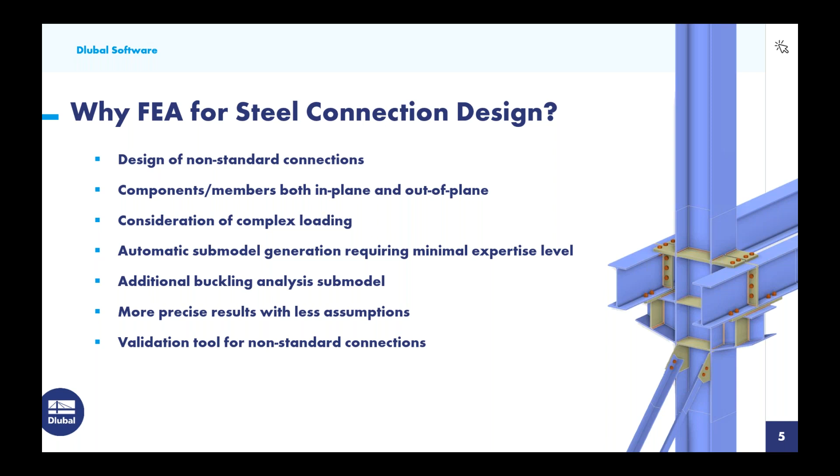So now moving on to the RFEM steel connection design concept. Again, a little unique in comparison to a lot of the other programs out there. So we will probably generate the entire steel structure in RFEM. It's not required, but this is one approach that we could take.

Welds are also converted to 2D elements for a stress design, as well as one-dimensional rigid links to transfer those forces again back to the plate elements. Now, we typically would model our steel structure with a linear elastic material. The program will automatically convert this linear elastic material to a nonlinear plastic material. So we'll be able to account for the yield strength of these steel materials themselves.

We also will have some geometric nonlinearities that are automatically created. And what I mean by this are topics called surface contacts, where essentially if we have two plates modeled together, they can fail in tension so that we have our bolts take over those forces, but in compression, we should see full force transfer. Some of the members, such as those spoke members that are modeled around our bolt elements, will also have nonlinearities applied.

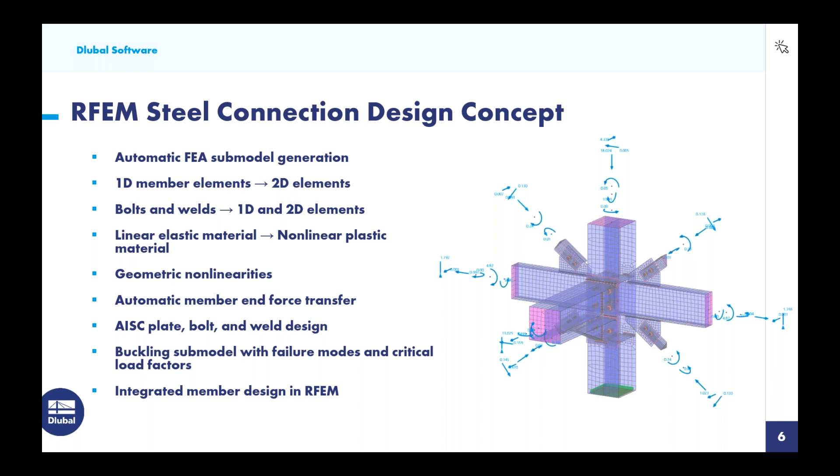And finally, the integrated member design within RFEM. Of course, we can get the connection design, but the ability to design the members themselves, and not just steel, but any material that we offer. So you could combine this connection design with concrete, aluminum, cold-formed steel, even topics like fabric tensile structures. We could do the steel connection design within that same file.

Okay, so we will begin then in RFEM here with our initial example. When we create a new model, we will give it a model name. The type of model here is going to be in a 3D environment. So although we just have a simplified 2D frame here, we still are accounting for all forces in and out of plane. Under the second tab, for those of you who are not familiar with our program, RFEM is the base program. This is where we can fully model, load a structure, and get the full static analysis.

But if we want to do a more advanced analysis like dynamics, for example, or we want to do design according to the various standards, this is where we would need to activate these optional add-ons. So you would purchase the add-ons that are specific for your project design. Now for today, we'll be activating here the steel design. So this carries out the steel member design according to the AISC, and of course the steel joints for our connection design.

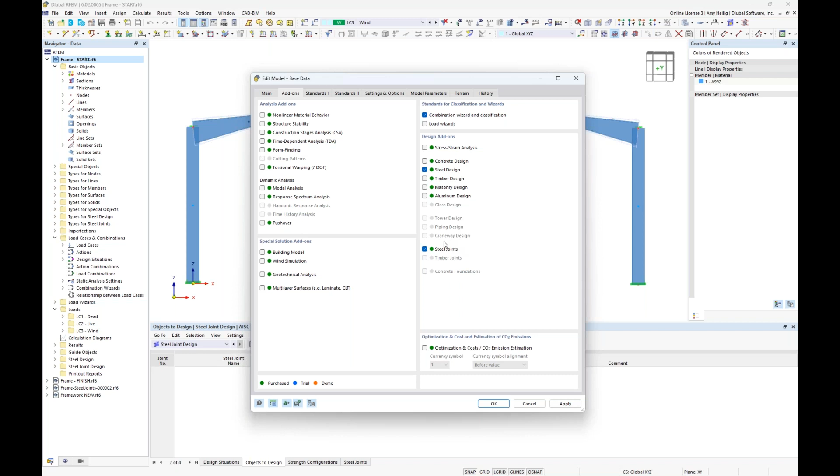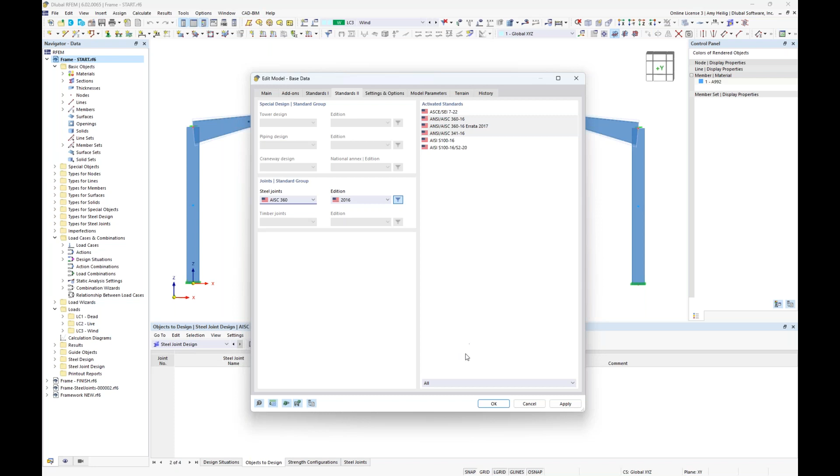Under the third tab, we will generate the load combinations automatically according to the ASCE 7. We have added the 2022 standard, so that's available here. The steel member design will be carried out according to the AISC 360-16. And under our fourth tab here, Standards 2, the steel connection design will be carried out also according to the AISC 360. So once all of this information is input into our base data, as you can see here, for the sake of time, I've already modeled this simple 2D frame here.

So let us just quickly go over some of the information already shown. Well, if we turn this into wireframe view, these members, as I mentioned, are just standard one-dimensional elements. So this is pretty usual for any FEA program, that when we model columns or beams or braces, they're represented by this single line only. But if we turn this into rendered view, we get a better understanding of what this line represents. Now, we also have here the materials assigned to these members, and currently these are all A992 linear elastic materials. We also have our cross sections.

You can see here the columns are assigned as W14x48. And for my beam members, these are W12x35s. But I also have applied a small taper at the beam member end.

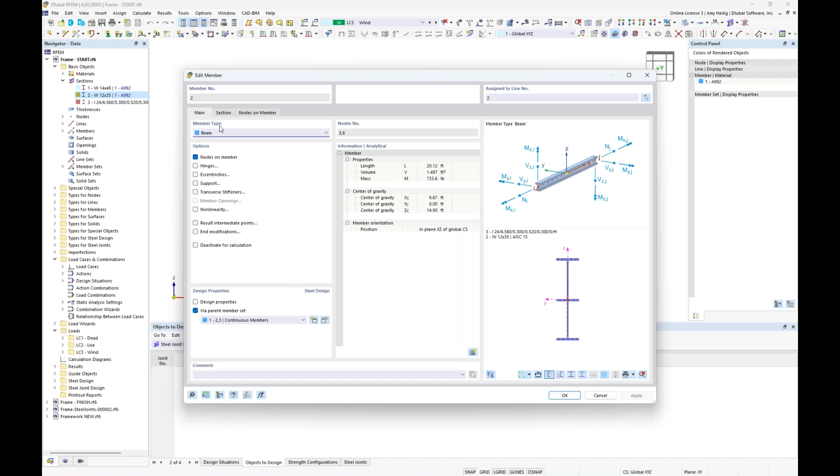So if we double click on this member to go into the beam dialog box, under the second tab here, section, we do have the ability to set a taper at the member start or the member end and other multiple options here. So I'm currently applying this taper at the first 25% of the member length. And we also can align the taper to the top of the member, for example,

and this picture over here will update accordingly. So as mentioned, the beams are primarily W12x35, but where this taper occurs at the member start, I took that W12x35, I created it as a user-defined section to simply increase the depth. So now we'll linearly transition in the first 25% of this beam member back to the W12x35. So that's a little bit about what's going on with our members.

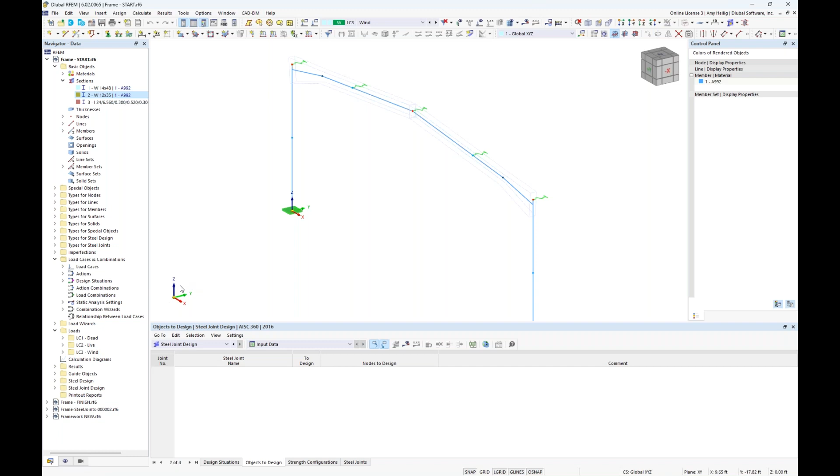So turning this back into wireframe view to quickly explain our support conditions, we have a fully fixed support down here at the bottom, which was just applied by utilizing the assign nodal support up here in my toolbar. And also because we are working in a 3D environment, I went ahead and put some additional spring supports up here only in the lateral global Y direction. So we'll account for maybe additional members framing in to give that lateral stability at the top of our frame.

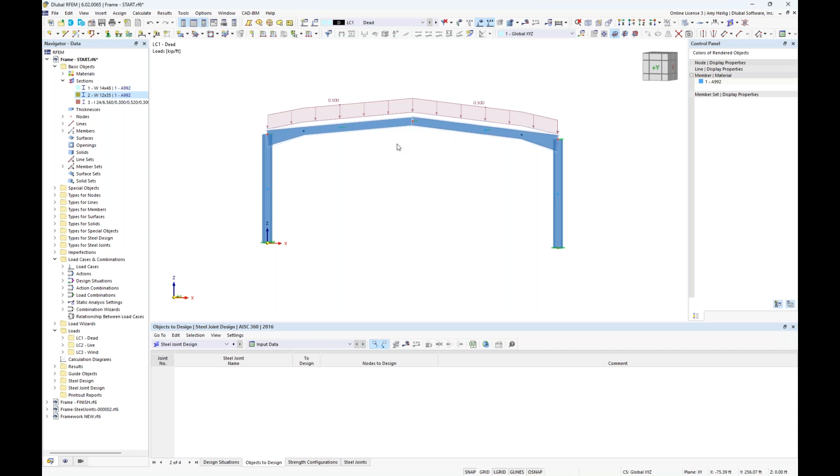And finally, we want to cover the loading. So we have 3 simple load cases for today, and we can see these within our drop-down box up here at the top. If I turn on my loads, my dead load is 0.5 kips per foot, applied as a member load. When we look at our live load, same concept here, just with a reduced magnitude of 0.3 kips per foot. And then a very simple lateral load here for our wind load case with 0.3 kips per foot at the front side and 0.15 kips per foot at the rear side.

Going into our load cases and combinations dialog box, we will once again see here under our load cases our 3 simple load cases for today, dead, live, and wind. Category was set accordingly to the ASCE 7. The program is automatically going to generate 2 design situations for us. We have here our LRFD design situation and our ASD design situation.

This is really nothing more than just grouping together all of our factored load combinations according to the ASCE 7 for this first design situation. And we can click on this little info button here to see the code references to those load combinations directly. Now notice that these are used within these optional add-ons that we turned on, so steel design and our steel joint or connection design. I will be utilizing these design situations. I'm carrying out my design according to LRFD for today.

Now we also have this second design situation, which is just simply grouping together our unfactored load combinations. I'm going to use this for my serviceability checks for my steel member design, but we really don't need it for our connection design because serviceability is not something that we're going to check. Now, alternatively, if you were carrying out ASD design for both your members and your connections, we could go ahead and turn it on here and maybe deactivate it for the LRFD design situation. But again, moving forward with LRFD design, we'll go ahead and leave these options as default.

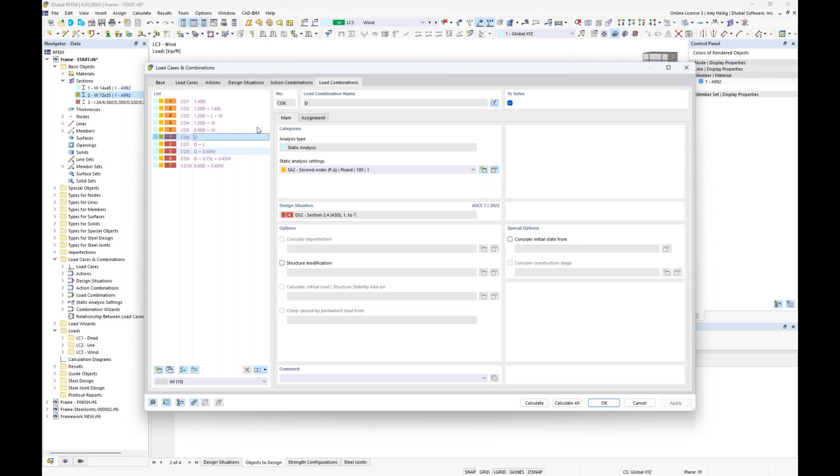And finally, under the load combinations, you can see here the individual load combinations listed out based on the load cases I have defined. All of my factored load combinations are shown here in orange, which belong to that first design situation. And then we have our unfactored load combinations shown in red that belong to the second design situation. So just keep these design situations in mind. We'll come back to them a little bit later on.

So now that we have fully reviewed this model, let us begin by defining our first connection. So because I have activated the steel joints add-on under my base data, we now have a folder option over here on the left called types for steel joints. Well, currently this is empty, but I can right click to create a new steel joint. And initially, I want to select the node that I would like to apply my first connection. So we can graphically select node number 6, or I could directly input the number here into this dialog box. Both of my members were automatically brought in.

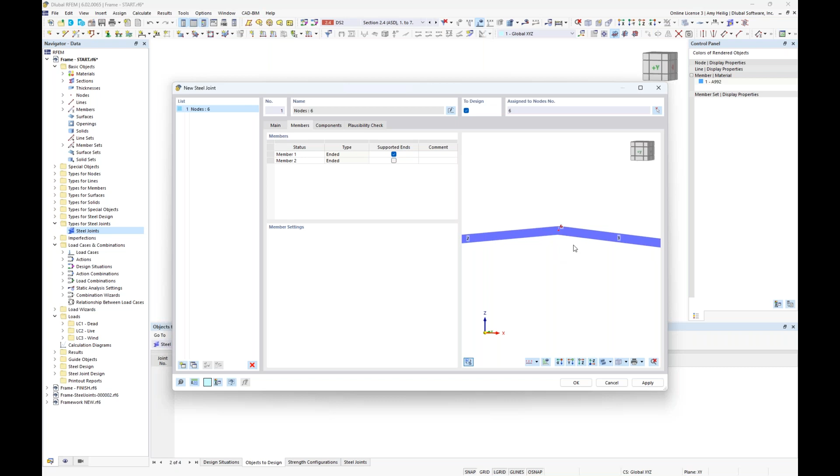Looking at this second tab. So remember that we are going to more or less extract out this submodel for our connection design and run it completely separate from our steel frame that's happening here in RFEM. And because of this, we need to fully support one of these members in that submodel. So we'll go ahead and utilize the support for the beam over on the left.

Now the type is set to ended. This only means that if all of these members simply end at this connection, then the type would be set to ended. Now, in another scenario where we maybe had a continuous column passing up through here, but it was modeled as two separate members back in RFEM, then we would have an additional type option available to us in a dropdown called continuous.

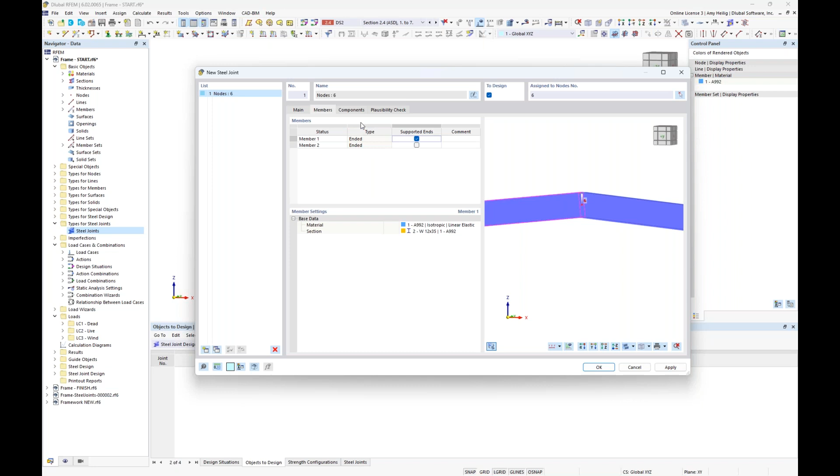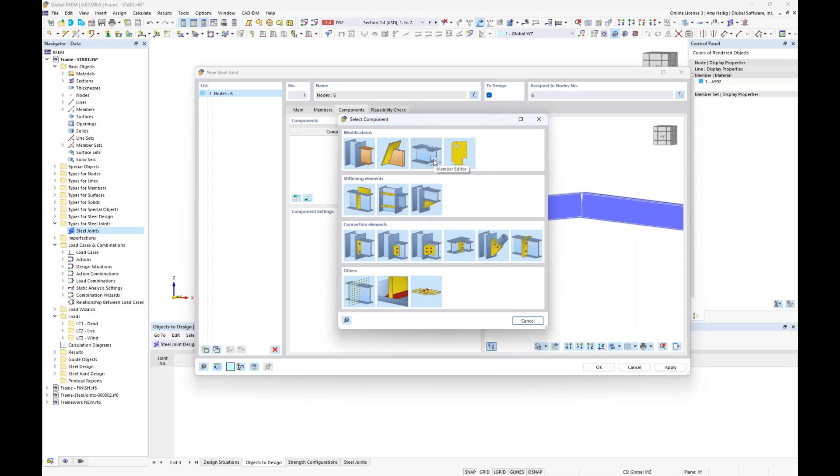Under the Components tab, this is where we begin to build up our connection components. And we could certainly individually do this with our component database. And we see each one of these components that we can individually input, such as end plates, or we can input fin plates, cleats, maybe plate-to-plate connections for beam splices. We also have stiffeners and haunches, and then we have some additional modifications up here that more so relate to the geometry. So we can make member cuts, or we can add in openings or notches into our beam elements.

But rather than inputting these individual components, we could also take advantage here of our library options. And within these joint template library options, we have 4 general categories, including rigid connections, pin connections. We also have truss connections and brace connections. So beginning here with the rigid connections, we have additional subcategories such as beam to column, and so on. And within these subcategories, we have additional template options.

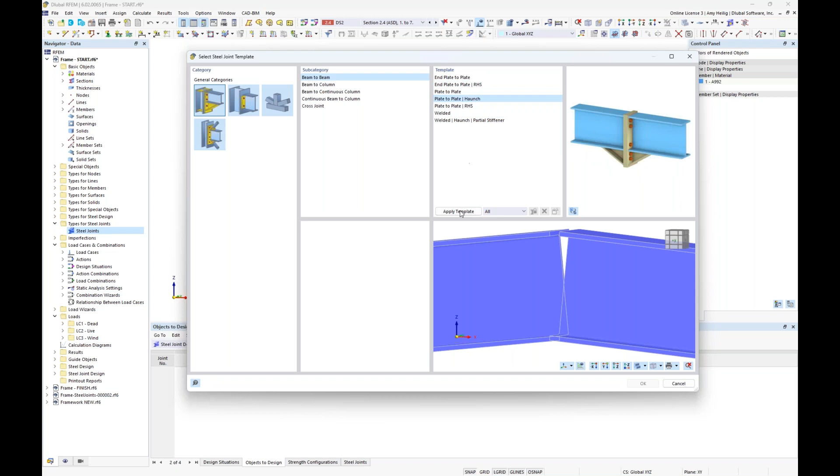So looking at the beam to beam, we have an end plate to plate. We have an end plate to plate with a rectangular hollow section. For today, we're going to utilize this option plate to plate with a haunch. So when I click apply template here, it's automatically going to apply these components from this library to my specific members here within my RFEM model. So I can click OK, and now we see these individual components listed out here and applied again to the members within the RFEM model background.

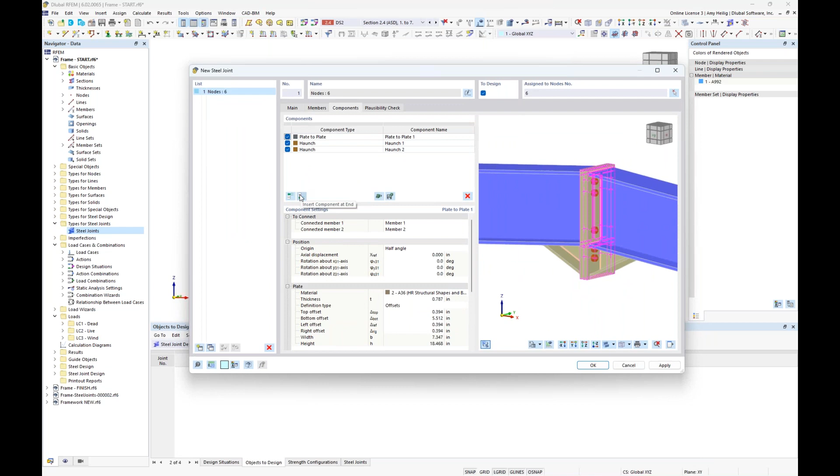Now, we could certainly add on with the individual components here and just use the library as a starting point. We'll certainly need to make some modifications here to our geometry, but once you have your connection set and you utilize this connection quite often, it's always recommended to save this under your own user-defined template as well. So you can see here within this button, we could give the connection a name, set the filter categories and subcategories, and now that connection will always be available for any future RFEM model. So that could certainly be helpful if you don't want to redefine the geometry changes or components every time.

So starting off with the first component, you can see here it is plate to plate. We are connecting both members 1 and 2. We can make modifications to the position, but we'll go ahead and leave all of this as default. Now we do need to define the material of these plates. I already have A36 defined within my RFEM model, but if you did not, you could just access our material dialog box with these 3 buttons here. So within the material dialog box, we can further activate the material library. Over on the left, utilizing our filters to steel, to the AISC 360, then we could go ahead and choose whichever relevant steel material we'd like for this particular component.

Again, utilizing the A36 that's already been defined, I will modify here the thickness of my plate. So we can go ahead and change each plate to 0.5 inches thick for a total thickness of 1 inch. And now we need to define the plate offset. The offset just means what is the distance from the top of the plate to the top of the flange, and then the bottom of the flange to the bottom of the plate, as well as left and right. So starting off with the top offset, I'm going to modify this to actually a negative 0.375 value. I'm going to drop this plate down below the top flanges here on my beam in the event that we have some type of sheathing material that we don't want to interfere here with these plates.

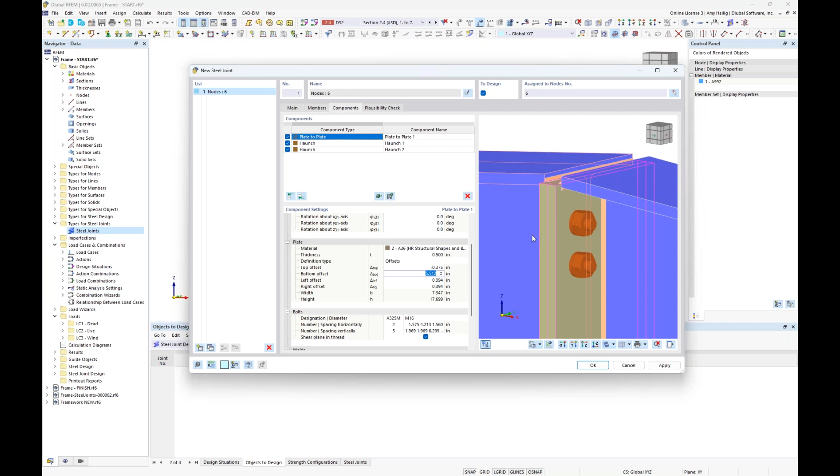Now, as far as my bottom offset, we'll go ahead and modify this to around 5 inches. And then we have the offset on the left and right, which I will set at 0.5 inches for the left, and I just hit enter on my keyboard, and 0.5 inches on the right. Now, the dimensions of the plate will automatically update here.

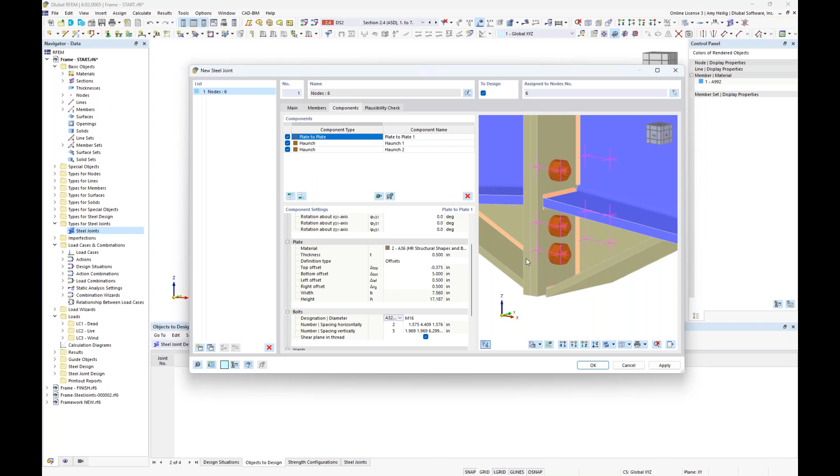Next up is our bolts. So we have here the designation of the bolts within our dropdown. We will select A325. And in the drop-down box next to this, we can then select the diameter. So we'll choose 3/4 inch diameter for our bolt layout today. Then we have the number of bolts in the horizontal direction as well as the spacing. So currently we have 2 bolts in the horizontal direction, one on the left and one on the right. So we'll go ahead and stick with a total number of 2 bolts.

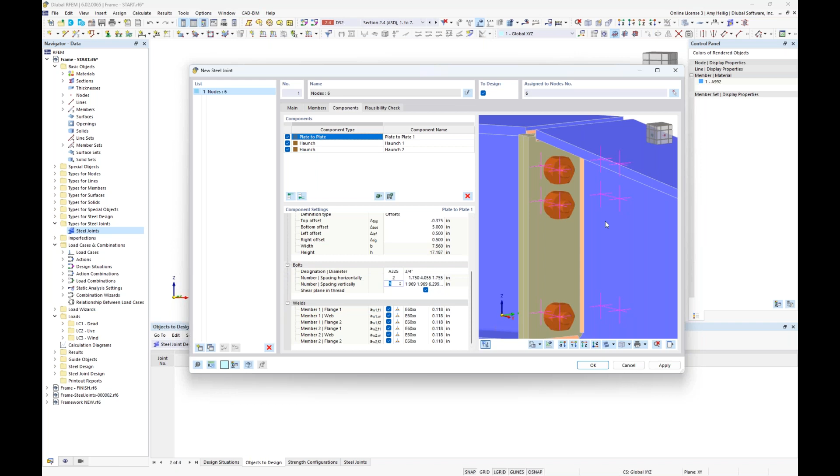The input here in our second column is just simply the horizontal spacing. So the first spacing that we would want to input in here is just going to be the distance from the edge of the plate to the center of the first bolt. So I can input in 1.75 inches. I hit space on my keyboard. The next distance is from the bolt here to the bolt on the other side, and that's going to be 4.055. And then if I just hit enter, the program is intelligent enough to set that additional dimension here from the center of the bolt to the edge of the plate. Now, keep in mind that the program will attempt to center these horizontally, so you may not need to make any changes there, but if we want to adjust that spacing, this is how we would do so.

Now, as far as the bolts in the vertical direction, currently we have 5 bolts, but I'd like to reduce this to 3 bolts instead. And obviously, once we update this, we need to adjust our spacing. So we have the vertical spacing. The first input option is going to be from the top of plate to the center of my first bolt, which will be 3.5 inches. I hit space on my keyboard. The next spacing will be from this first bolt to the second bolt, which will be 5.5 inches. I hit space again, and we need to lastly define the spacing here between bolt number 2 and bolt number 3 as 5 inches. I hit enter on my keyboard. The program will populate the last spacing here from our bolt down to the bottom of the plate.

Now, is the thread located in the shear plane for our bolts? If so, we leave this option turned on. If not, we would go ahead and uncheck it. And finally, we move on to the welds. So we can see here that these welds are labeled within this first column, but as I scroll through them here, they're also highlighted graphically. And if I didn't want to apply any one of these welds, I could just simply uncheck it here, and that weld would be taken away from this particular connection.

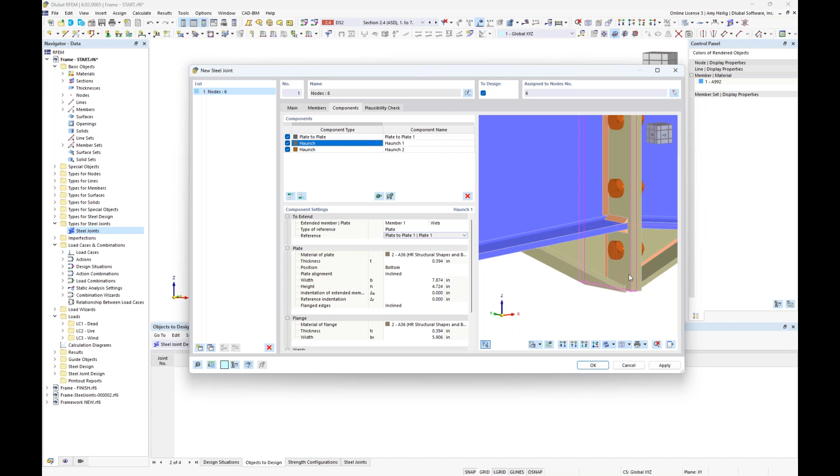We want this haunch to be extended to our plate shown here. The material is set to A36. We do want to modify the thickness to 0.5 inches. We can also modify the width and the height, so I'll modify the width to 12 inches and we should see that graphically displayed. The height is going to be 5 inches. You'll also see that the program automatically included a flange as part of my haunch.

If I wanted to get rid of that flange, I could use my drop-down box here to select the no option, and that flange should disappear.

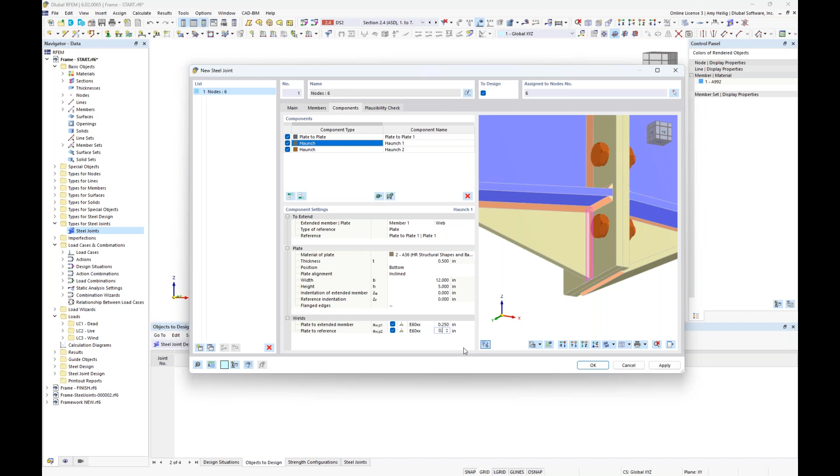Now, finally, we have our weld input for the haunch itself, and we have two welds, which we'll leave as a default double fillet weld on either side. Our first weld is on the underside from the plate to the bottom flange, where we will modify the throat thickness to 0.25. Our second weld is from the haunch to this end plate, which again we will modify that throat thickness to 0.25 as well. So looking at our haunch on the left-hand side, we're complete with this second component.

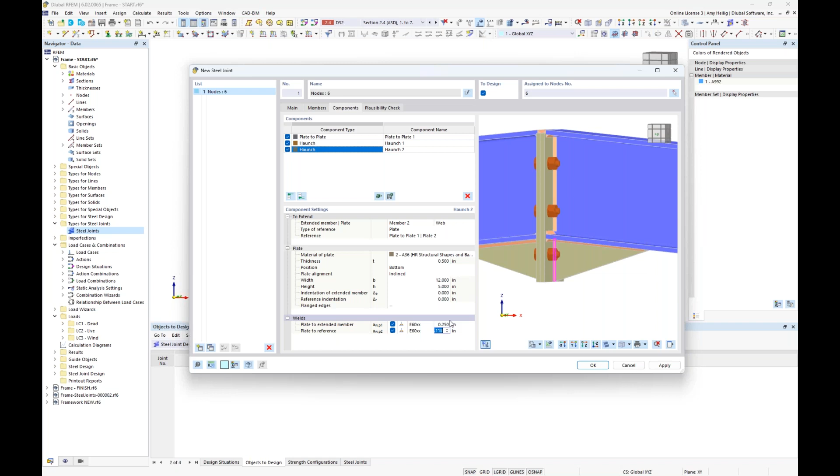We move over here on the right-hand side, and we want to make those exact same changes we just did to the left-hand side. So we'll modify the thickness to 0.5 inches, the width to 12 and the height to 5 inches, and then select no flange in our dropdown. Finally, we will modify the throat thickness to 0.25 for both of those input options.

So realistically, this connection is now complete. Again, if you utilize this connection quite often, save it to your user-defined library so you can pull it open with these modifications already set.

The final thing to do with any connection is to check out this fourth tab, the plausibility check. We see here it's a green checkbox with no errors found. If we had any issues, such as bolts overlapping welds or plate elements, or a weld extending beyond a plate, these would all be flagged here so we could take care of those errors before we move forward with the calculation.

So now that this connection is complete, we can click OK here. What we should see is that graphically, we're going to represent this connection within the main RFEM model.

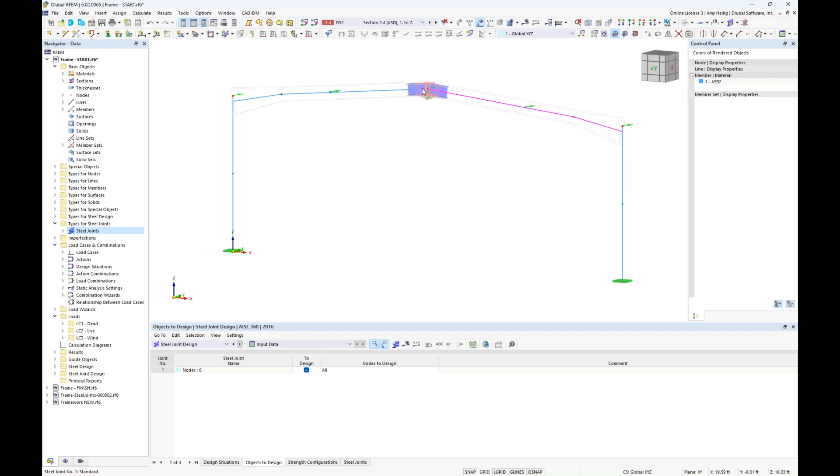Now, to explain a little bit further about what's going on, you'll notice that when I turn this to wireframe view, we still have those one-dimensional members, and these members are still framing from node to node. We're not going to cut off this one-dimensional member where this connection starts. Really, this is just a graphical display of that model, which will be acted out and completely calculated separately from this RFEM model. But it is nice to view in a little bit more detail exactly what's going on.

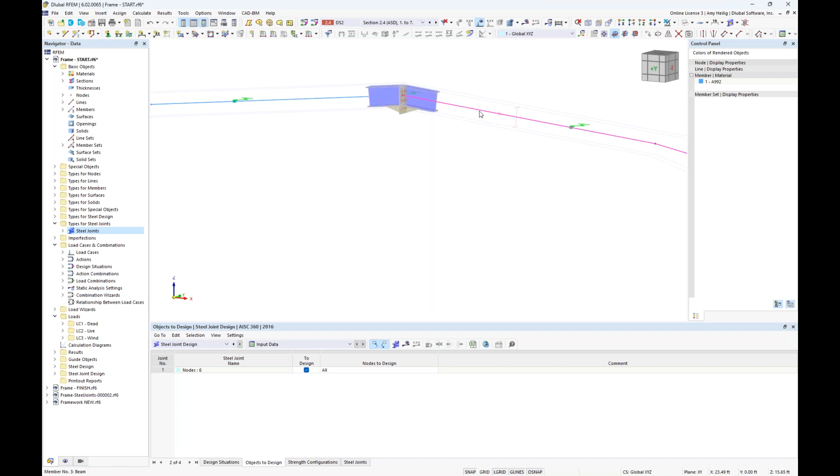Also keep in mind, a common question is that the member end forces for this beam will actually be taken at this node. They are not taken at this distance away where the connection will begin.

Going back into the rendered view, we can see this connection with all of the available components, the geometry changes that we just input. Now, with the display of our connection, we also have an additional option up here in our toolbar where we can completely hide that joint model with this dropdown if we're not interested in seeing it. We also have this simplified joint model, represented by some box type symbols here. And finally, we have the detailed joint model, which is currently default and turned on.

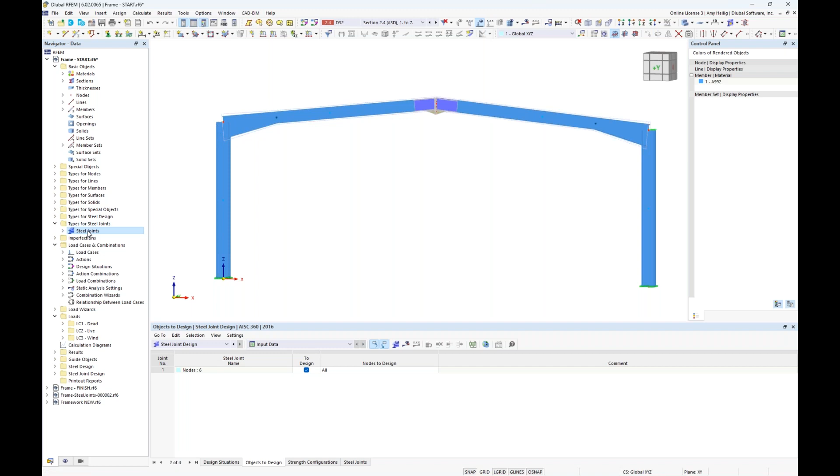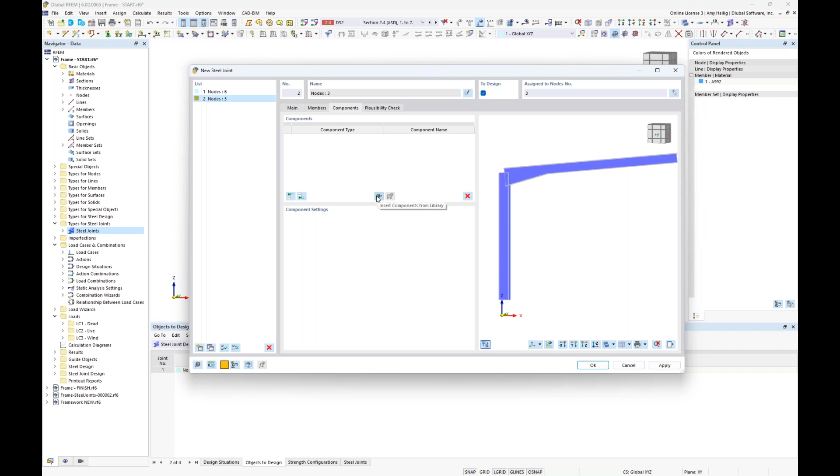So now that we have defined this first connection, we would like to move on to our second connection, which is going to be the tapered beam to the column. We can again right click over here in the types for steel joints to create a new steel joint definition, and we want to graphically select node number 3. I click OK. The two members are automatically imported here, and under the second tab, if you remember, because we're creating that FEA submodel, at least one of these members needs to be fully supported. So we'll go ahead and leave the column as fully supported. Under the components, we will take advantage of our library option here.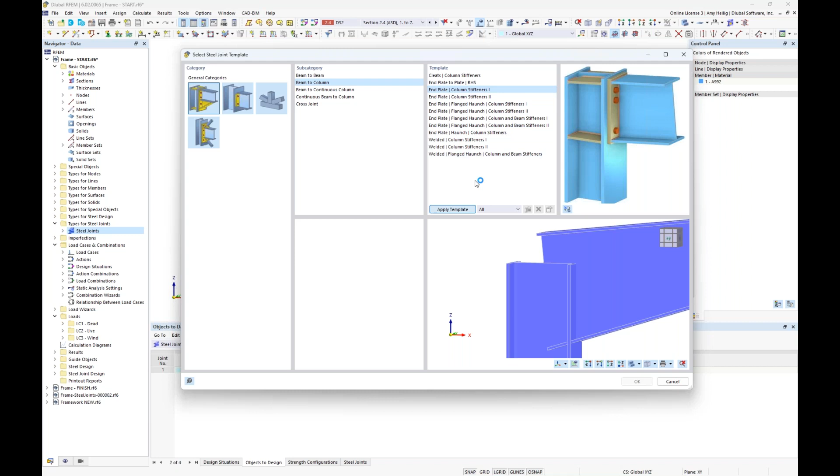This time under our rigid connection, we want to modify this to a beam to column connection. Within the additional template options, there are many different choices, including cleats or an end plate. For today, we want to utilize the column with stiffeners. I'll hit apply, and we should see these individual components applied directly to my model.

I think we could all look at this connection and agree that it certainly does not look correct. This is really just an issue of the program not knowing which member is the beam versus which member is the column.

That's controlled simply with our options over here on the left. So in our dropdown for our column, we want to change this to member number 1. Then our beam element, we want to specify as member number 2. Now this connection should look quite a bit better. So we click OK.

Just like with our previous joint, we will now see all of those components individually listed out here. Let's begin with the end plate. You can see here that we are taking member number 2, which is that tapered member, and connecting it to the reference member number 1.

Steel A36 will be utilized for the material. If we want to modify the thickness, we can input this as 0.75.

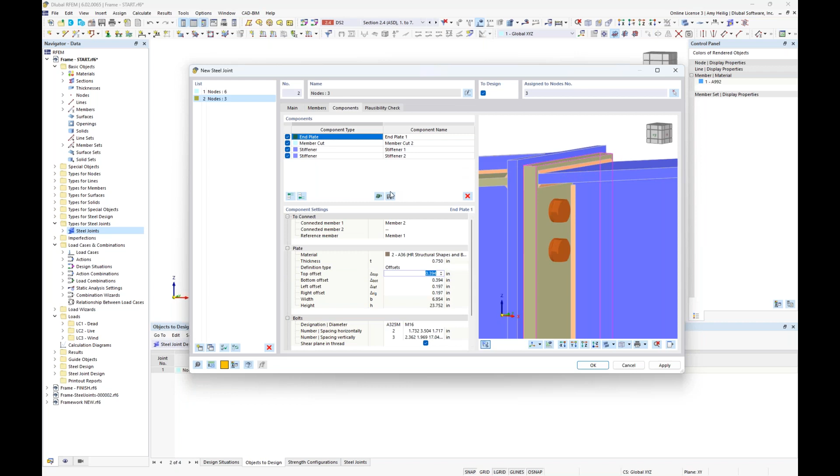Very similar to our last plate element, we want to define the offsets. Looking at our top offset, remember that's the top of the flange to the top of the plate, we'll modify this to 0.5 inches. For the offset at the bottom, we'll modify this to 1 inch. Then we have an offset on the left and right-hand side of those flanges, and we'll set this as 0.25 on the left and 0.25 inches on the right.

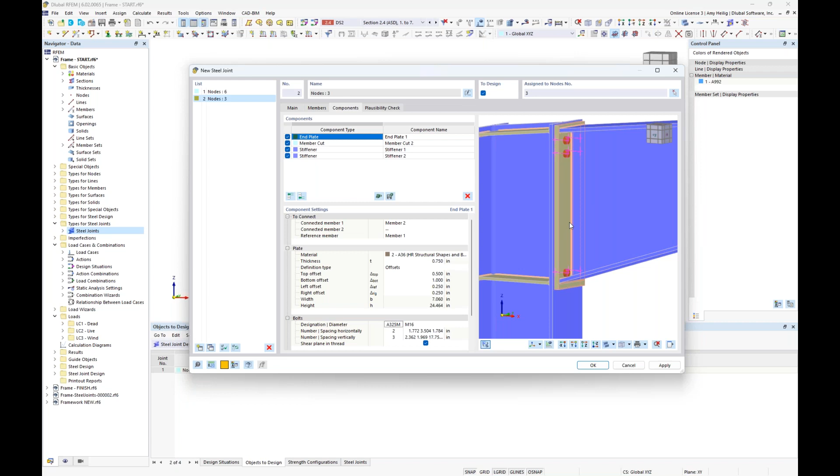Now looking at our bolts, clearly we need to make some modifications here. We will be selecting A325 from our dropdown. The diameter of the bolt is going to be 7/8 inches. We are going to leave this as 2 bolts on either side, so 1 bolt on the left, 1 bolt on the right. The program has again centered these, so I'll leave these as default options.

As far as the vertical bolts, currently we have 3 shown, but I want to increase this to 4. Once I input the 4 bolts, we'll make some modifications to our vertical spacing as well. The first input option is from the top of the plate to the center of the first bolt in the vertical direction, which will be 3.5 inches.

I hit space on my keyboard. We now need to define the spacing from bolt number 1 to bolt number 2, which will be 5.5. I'm actually going to apply 5.5 inches to the additional spacing 3 times between all of these bolts. I then hit enter on my keyboard, and we see all of those update graphically here.

We'll leave the shear plane in thread turned on. And finally, we have our welds. So we have the weld at the top flange, again leaving the fillet weld on either side as default with E60 strength. We'll modify the throat thickness to 0.25 once again.

We take a look at our weld at the web here. We'll modify this throat thickness to 0.25, and we do the same thing for our weld down here at the bottom, modifying this thickness to 0.25. So now our end plate is complete.

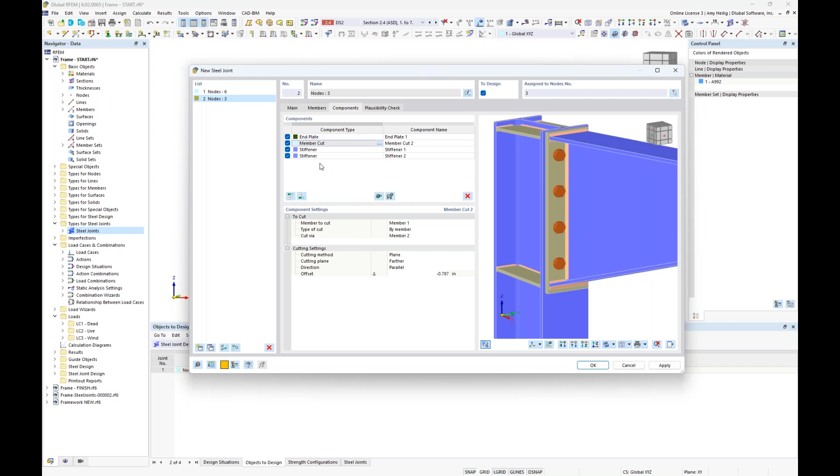So we'd like to move on to our second component. Remember that not all components necessarily insert a physical object into this connection, but there are components that deal with modifying the geometry. One of them is called a member cut.

For any one of these components, we can always not consider them by unchecking them here. Without that member cut, you can see here that the column just stops essentially at the middle of that tapered beam. This member cut will actually extend this column up to the top flange of the beam.

So we're taking member number 1 here, and we're going to make that cut by referencing member number 2. Now the cutting method is set to a plane, and the cutting plane has 2 options, either closer or farther.

When I set this to closer, notice that the column is automatically cut off at the bottom flange. But when I use the option farther, we'll extend that column to the top flange instead. The cut of this column matches the incline or pitch of my tapered member, shown here in this 2-dimensional frame.

If we want this column to be completely straight across, we can use the drop-down options to choose perpendicular instead. Now notice that column is cut straight across, not considering that incline. We'll match that pitch again by changing this back to parallel, and now that will match the top flange of my tapered beam.

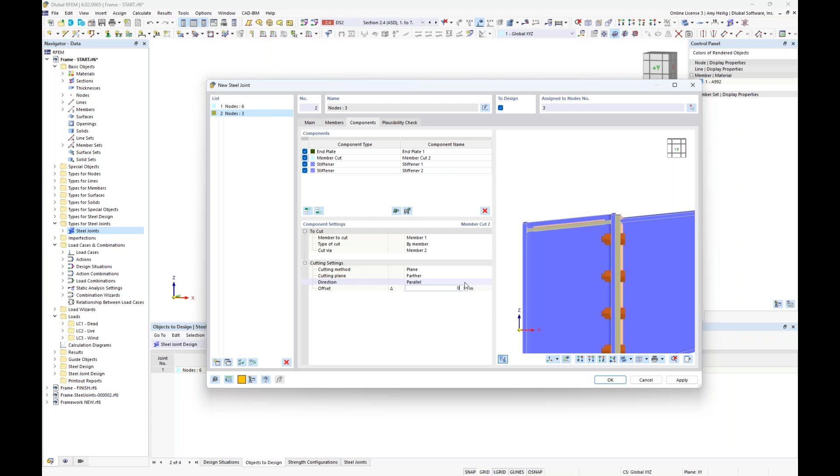We also have the ability to set an offset. If I have this offset set at 0, it simply makes that member cut to match the top flange, or I can set this offset to negative 0.75 inches, which will extend it slightly above the top of this beam. So that's all that is needed for our second component.

We now want to move on to the stiffener. We see here this stiffener applied, and the stiffened member is referencing member number 1, but we want to apply these stiffeners based on referencing member number 2, the beam. The material is A36 once again.

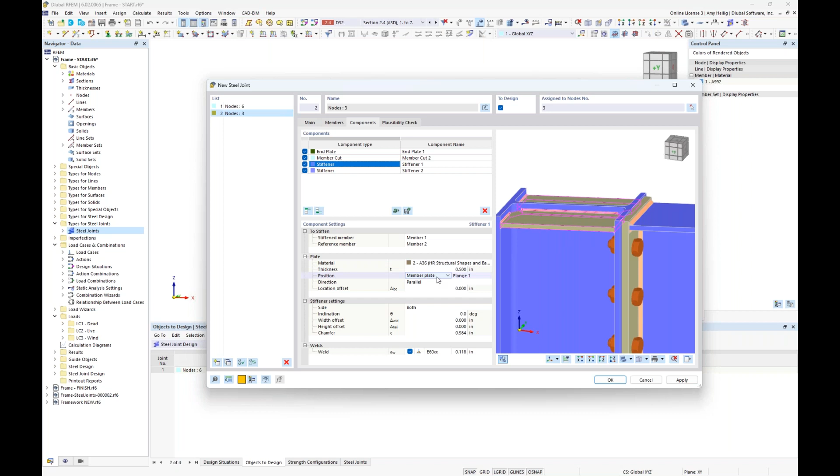Perhaps we want to modify the thickness to 0.5 inches. And we are applying these stiffeners based off the member plate flange number 1 here of our beam, so everything is parallel to that top flange.

Alternatively, if I didn't want it to be parallel, I can make it perpendicular so that we have the stiffener going straight across. Of course, this doesn't make sense here because our column isn't extended up high enough, so we'll change this back to parallel.

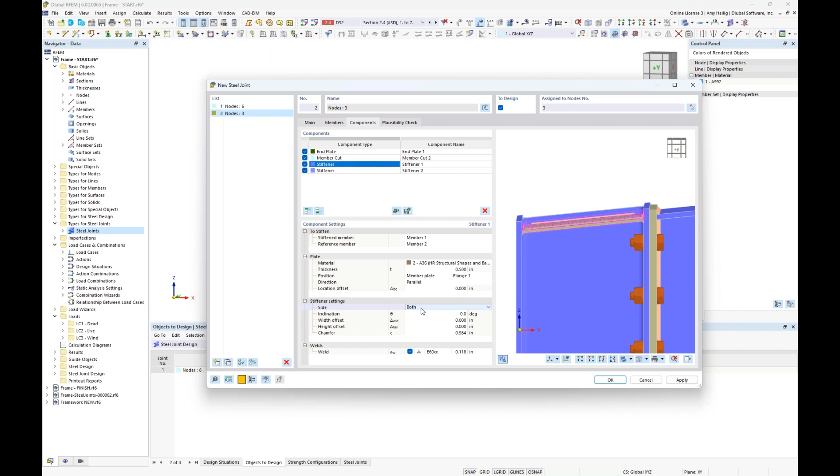We could also add in an offset to move the stiffener up or down. We also have the ability to set the stiffener on both sides, or within this drop-down option, we could choose just the left or just the right.

And finally, as far as geometry, we have a small chamfer here, so we want to set this dimension to 1 inch exactly.

Finally, we have the weld. Just like what we saw with our other weld input for our additional components, we're going to leave this as a double fillet weld, E60, with a throat thickness of 0.25. This is just connecting that stiffener back to the column.

Now we also have our last component here for our stiffener shown at the bottom flange. Again, if I didn't want to account for it, I could just completely turn it off. Or if I wanted to delete it altogether, I can use this red X.

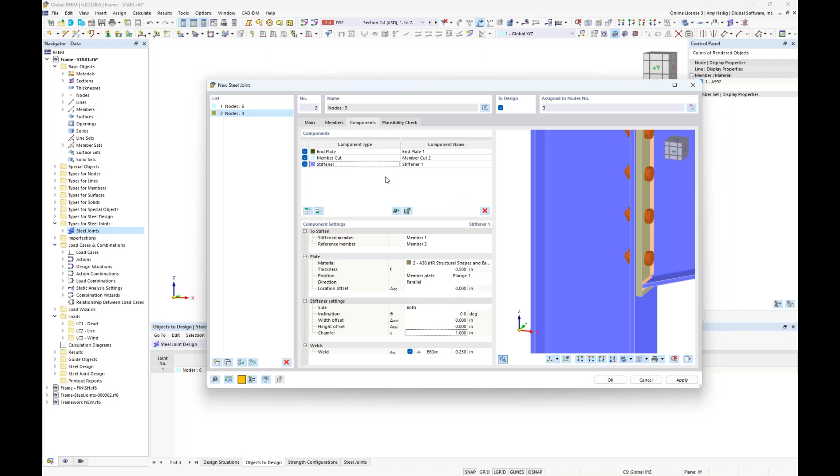So I just make sure that I'm selected under that particular component, and I delete it altogether. The reason why I wanted to show you is that we have a nice feature for existing components: if we right click, we can copy the component to the end of this list. This is a huge advantage if we've made a lot of modifications to our component and don't want to input all that information again—we just simply make a copy.

Now, currently the second stiffener is sitting right on top of the first stiffener, so that's not ideal. What we can do is simply move it by referencing, instead of flange number 1, flange number 2, which is highlighted here as I select it within my dropdown. Currently it's set to parallel, so it matches the angle of that taper.

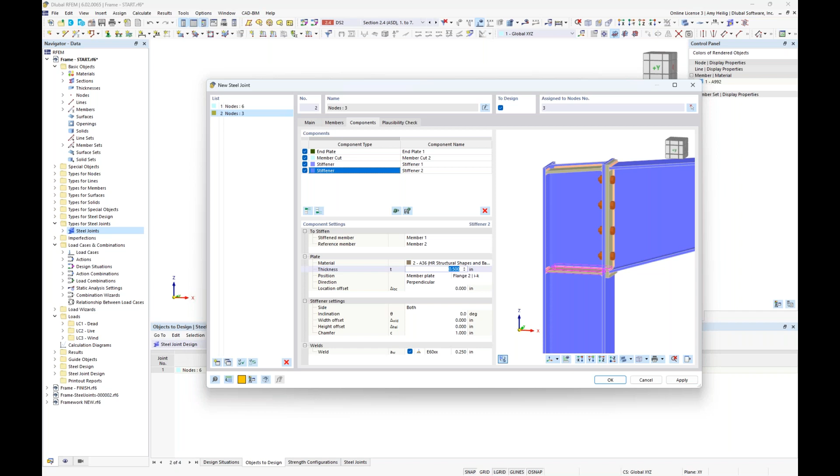But if we wanted to modify this to perpendicular, we can do so. Now we see that stiffener shown at the bottom in the perpendicular position. And if we wanted to modify the thickness to something smaller, we could do so here at 0.375. So now this fourth component is complete.

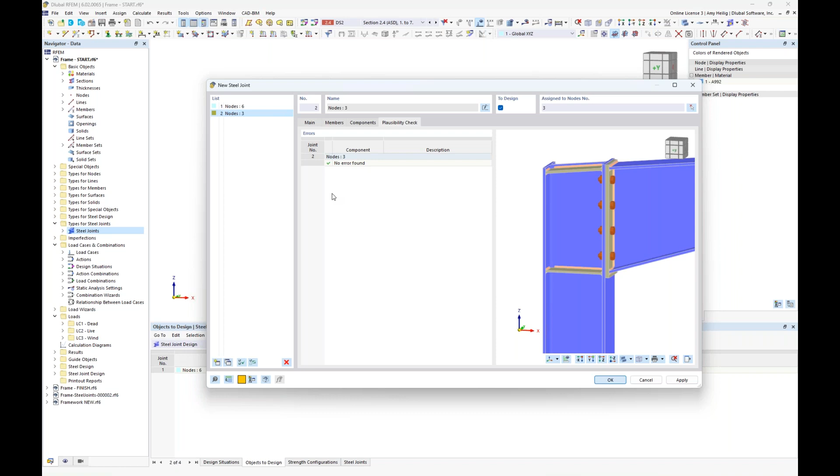Again, checking the plausibility, no errors found. That's great. If we had any issues with geometry or anything else, the program would notify us here. So when I click OK, we should now see this connection applied over here to the left-hand side.

What you will notice is that we actually want to apply this exact same connection here on the left-hand side to the right-hand side. Rather than redefining all of those additional components and a new steel joint, the program is intelligent enough that I can go back to node number 3, my connection that I just defined, and in addition, select node number 11.

And I click OK. So we have an identical layout for our joint template here. It's just simply the mirror image of the other side. So again, if you have the exact same connection details, but it's just slightly oriented differently within the model, you could certainly apply multiple nodes to the same joint definition.

All right, so we are almost ready to move forward here with our analysis in our design. But one thing that I did want to cover before we do, if we go back into the steel joints and we go into edit the dialog box, this brings us back into the dialog box that we have previously been in, but you'll notice here there is design configurations. And there is one option here for strength configuration with a default setting already specified.

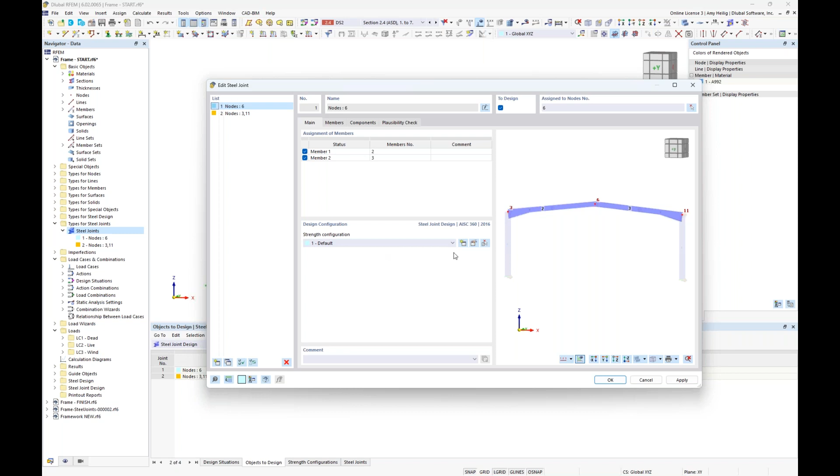Well, the strength configuration, if we go into edit this, is specific to the AISC design of our connection, but also that submodel that's going to be generated underneath the hood. And we have to assign a configuration to each one of these joints. And you can also create different configuration settings for different joints.

But taking a look at the default option shown here, you'll notice that the first option for my connection design is to also perform a buckling analysis. So we can go ahead and turn this on. Now, I do want to let you know that you have to own the stability analysis add-on in order to carry out the buckling analysis in addition to the actual AISC connection design. So if you want to take it that step further, you do need to own the stability analysis add-on.

You don't need to go back to the base data and activate it. Everything is controlled here through this dialog box. We now get an additional tab here for buckling. So in addition to that FEA submodel, we'll carry out an additional submodel for the eigenvalue analysis.

And you can see the analysis type is set to a linear analysis, but we also have nonlinear options here. Just keep in mind that obviously that calculation will take a little bit longer if you do apply a nonlinear analysis. We will calculate by default 4 eigenvalues, but you can go ahead and increase this or decrease this depending on how many different failure mode shapes you're interested in. Second order analysis is considered.

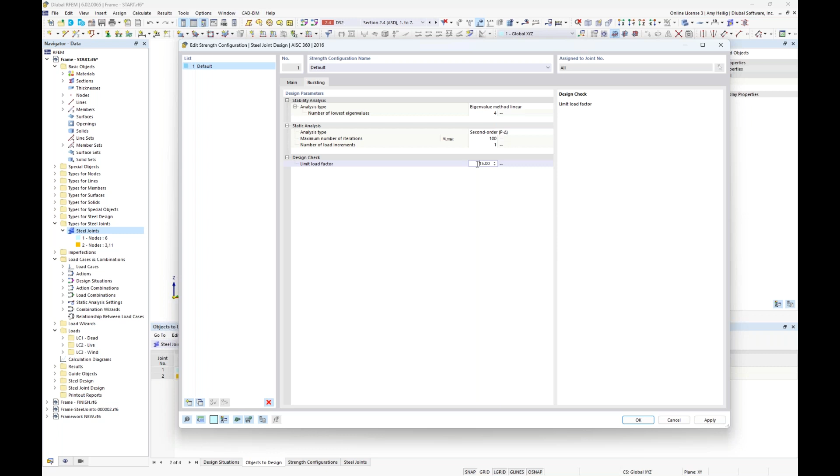And finally, we have the limit load factor. So this is a user defined input option here, and it all relates back to that critical load factor. So when the critical load factor falls below 15.0, the program will go ahead and flag you that maybe buckling is a consideration that you need to look at further for your connection. Again, you have the ability to increase this or decrease this factor. It'll make a little bit more sense once we look at the buckling results.

So going back to the main tab here, we have here our resistance factors for LRFD design, straight from the AISC standards, safety factors for ASD, and then a lot of this information down here at the bottom is specific to the FEA submodel and mesh generation, for example.

The FEA mesh back here in RFEM for our overall structure is going to most likely be entirely too large to apply to this much smaller submodel. So we will go ahead and submesh that to something much smaller, and we have some default options shown in here, but you can always come in and modify the FE mesh settings as well for that submodel.

Now, one thing I do want to go into a little bit further detail is the limit plastic strain. And you'll see this input is set by default at 5%. So let us go back to the PowerPoint to discuss this in a little bit more detail.

So by inputting in this plastic strain limit, this is going to be used for the strength limit state criteria for all surfaces. And what I mean by surfaces, remember that our one-dimensional members for our beams, our columns, these are all converted to 2D surfaces. So our flanges, our webs, our end plates, haunches, all of these are now 2D surfaces.

Well, also, we're probably utilizing a linear elastic material, but the program automatically converts this to a nonlinear plastic material. And with this material model, we are going to reference the von Mises yield criterion stress failure hypotheses. So when we look at the general stress strain diagram of a steel material, we see that shown here, the lower right. We certainly have our linear elastic region shown here before we reach that yield strength Fy.

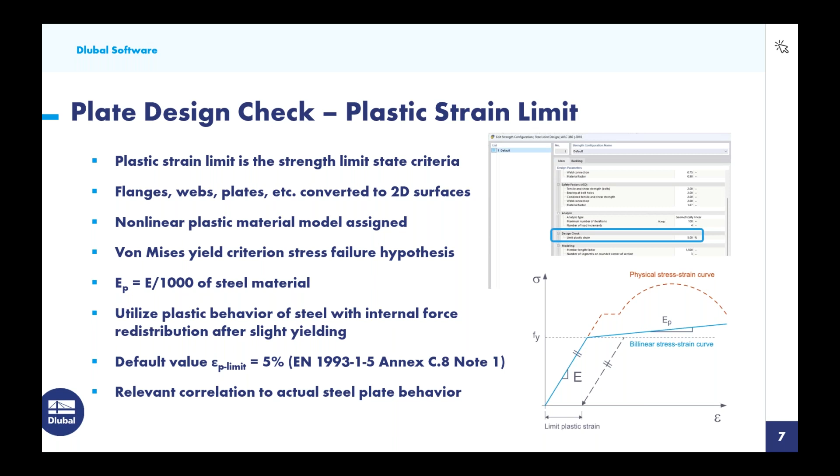But overall, there have been studies done on this showing good relevant correlation to the actual steel plate behavior by limiting the plastic strain instead of the stress. So again, that's what's going on here within our design configuration for all plate elements. This is the only check that we will carry out, by limiting that plastic strain.

So once this information is all input into our configurations, the final thing to do is to go back to our RFEM model and jump down to the steel joint design add-on. Within this add-on in table format, we have our two design situations, which we covered earlier. We have our LRFD design situation where we want to set this to the strength limit state for LRFD design.

Now, alternatively, if I was carrying out ASD design, it might look something similar to this, where I use my dropdown to carry out my second design situation for my unfactored load combinations according to the strength limit state for ASD design. But I'm carrying out LRFD design today, so we'll utilize that first design situation. For the objects to design, we will be designing all three connections here.

And in a very similar workflow, we also have the steel member design. I did an entire webinar devoted entirely to steel member design according to the AISC, which goes into much more detail than what we have today. My point today is just the ability to design the members along with the connections.

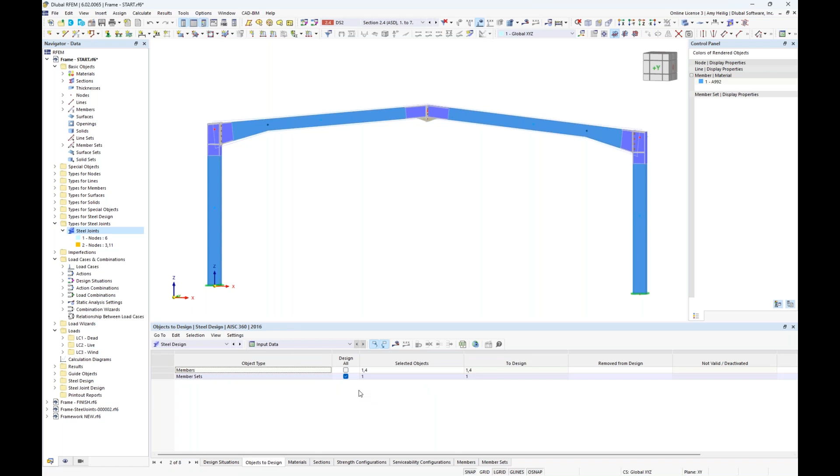So once we have input this information into the table, we are now ready to calculate all. But keep in mind, because we are now introducing these FEA submodels, it does take a few minutes to solve, a little bit longer than if we just had these steel 1D members alone. So for the sake of time, I'm going to open up an already saved model that has carried out the calculation.

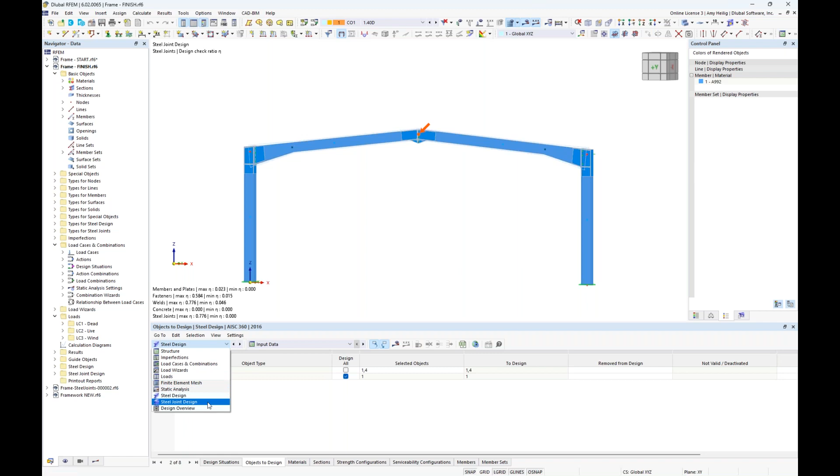Well, what we should see once we run our analysis and design under the steel joints table here is our results. And we can view the stress strain analysis design ratios by node. So now you'll notice here that I have 3 design checks for each connection. And these 3 design checks include the plate check, the bolt check, and the weld check.

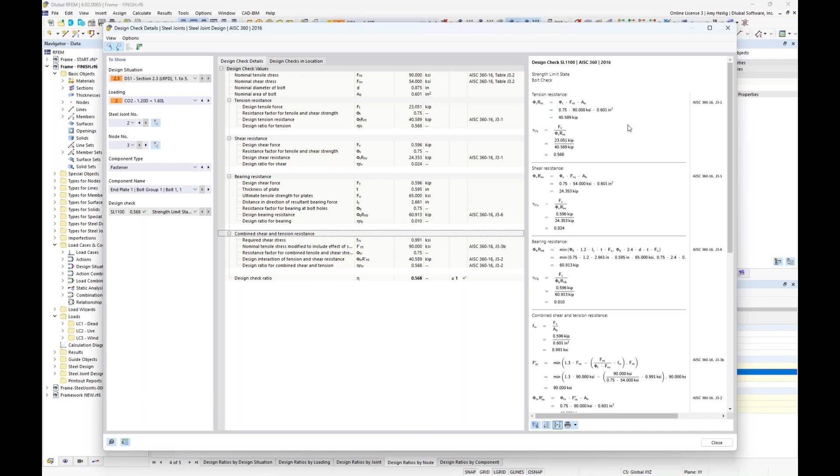And within any one of these specific design checks, such as the bolts here, I can go ahead and activate my design check details. And this is true for both the bolts and the welds. We'll take a look, though, only at the bolt elements. I'll go ahead and expand out my options over here on the left-hand side. I'll use my control key and I'll zoom in here to these equations. So hopefully those are a little bit easier for you to see.

But we are checking the bolts for all scenarios carried out by the AISC, including tension resistance, shear resistance, bearing, combined shear and tension, and so on. And then we take the max design ratio here out of all of these, and we'll go ahead and present it to you in that design ratio.

But all of the code references are given here, all of the formulas line by line. The variables are listed out here. You can add this information to your printout report. So trying to be as transparent as possible about where these specific checks come from. Same concept for our welds.

If we look at our plate check, so this is currently for my connection shown here at the left and the right, which you can see are highlighted. I'll go ahead and open up my design check details here, and you can see this looks quite a bit simpler. And this just all goes back to the PowerPoint slide that we just covered, that for all of our plates, we're talking flanges, webs, end plates, haunches, we are only going to check this limit plastic strain.

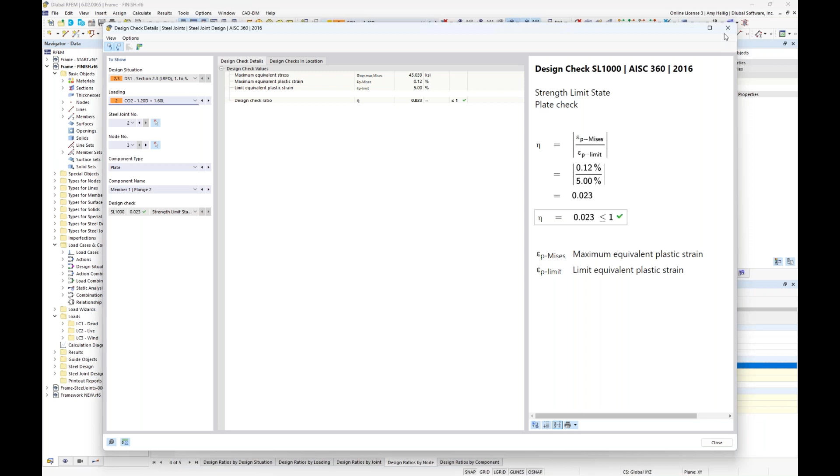So we have here the limit plastic strain set at 5%, and then we have our plastic strain from the actual analysis, and we ultimately get a design ratio. So that's going to be a little bit different here for our plate checks versus the bolts and the welds.

Now, in addition to the design check details, we also have the ability here called the results in steel joint. So we can go ahead and activate this, and this will actually show us our submodel here of this particular connection. So we're currently looking at the tapered beam to the column connection.

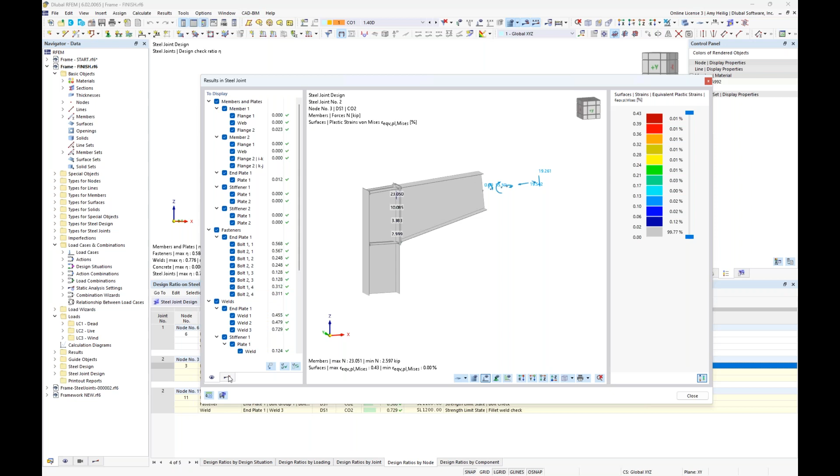And if I scroll here to my second tab, we are viewing the plastic strains for this connection for load combination number 2. And I zoom in here, and at first it really doesn't seem like much is going on. And that's just simply because we're going to gray out the strains that are probably not much of interest. But we do see some higher strains here at the top of the connection.

Now, alternatively, we can toggle this to the stresses instead. And this might look a little bit more interesting, that we can actually view the stresses for all of our components here graphically. And of course, where we saw those higher strains, we're also going to see those higher stresses given.

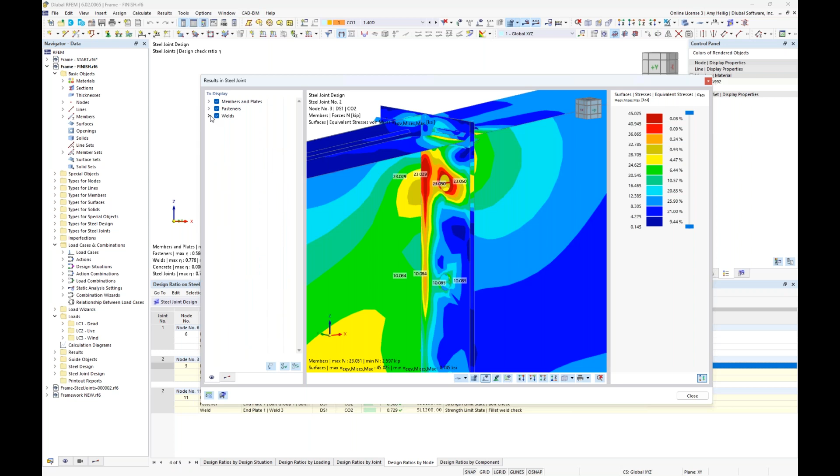So going back to this initial tab, if I go ahead and collapse these different display options here, I have the ability to actually turn off completely my members and plates and maybe my fasteners. And now I can view the stresses just on the weld elements themselves. Or if I'd like to turn on the bolts, I can go ahead and activate here the fasteners, and we see the tension forces in kips given to us graphically.

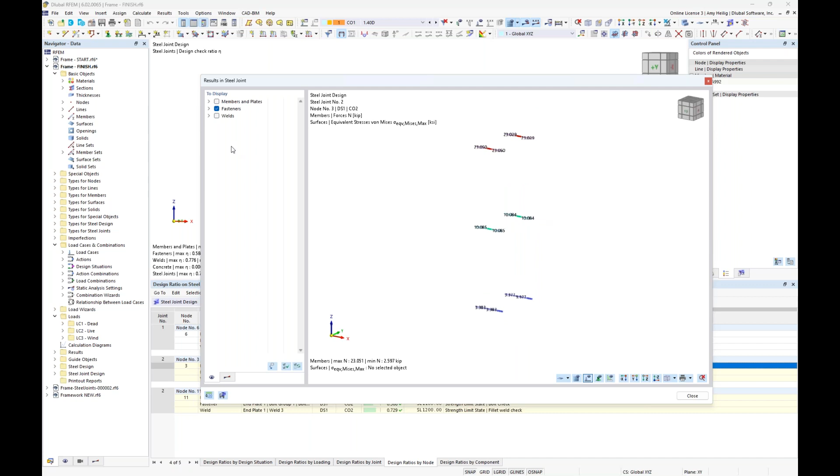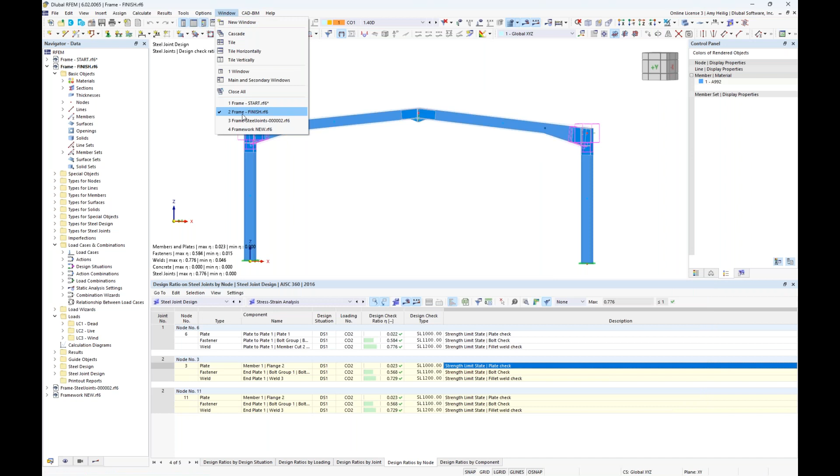And finally, going back to the display of all of these options, we go back to the stresses shown for all components. Now, in addition to viewing this information here, we have the ability to save this model to our computer. And when we save this model, we can open it up like any other RFEM model. So I went ahead and took the liberty to save that particular connection to my desktop so that we can see what this model actually looks like, that's all being created underneath the hood automatically for us.

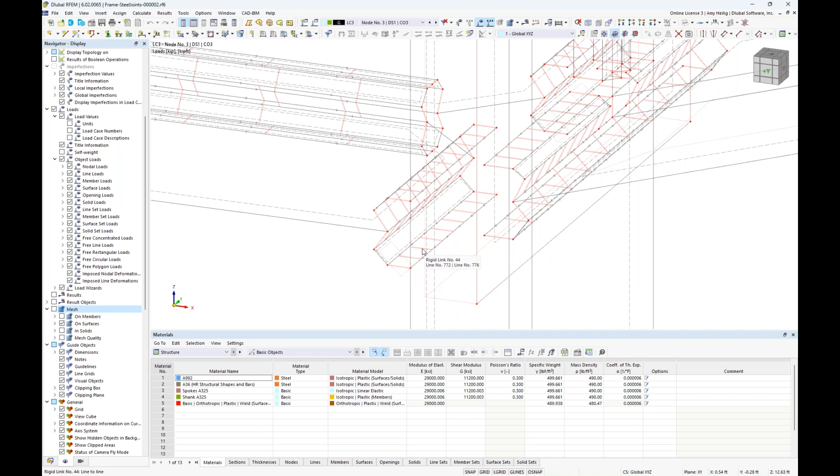And perhaps if I go back to my navigator here to turn off the mesh, we can look at our weld elements. And these weld elements are a mix of 2D surfaces in order to get the stresses, but we are also transferring forces between the weld and the plate elements with these small rigid links.

We also have our bolt elements. So I had mentioned some of this in the PowerPoint, but if we double click here, we can actually see that these bolt elements are represented by a standard beam element. The cross section is also taken into consideration, the diameter here of our bolt element that we've set, as well as the material.

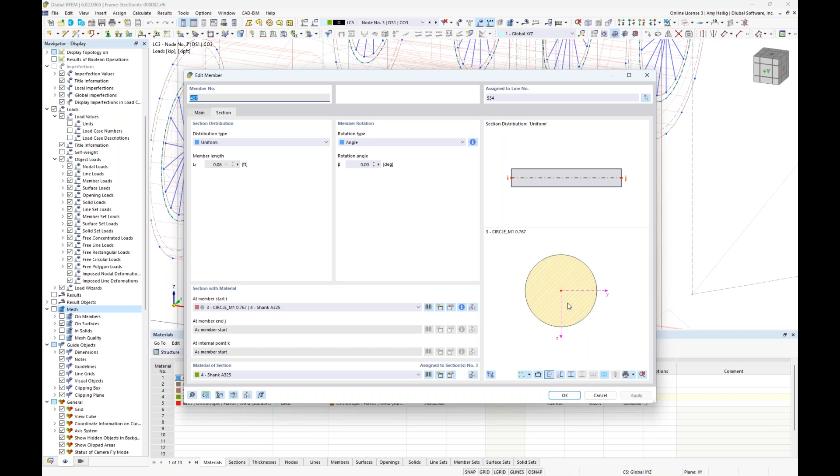And we are going to transfer the forces in this opening where the bolt is passing through with what we call these spoke members. And these spoke members are nothing more than beam elements themselves with a cross section assigned. And everything is optimized here with the cross section and the number of spoke members in order to transfer those forces between the plate element to the bolt and vice versa.

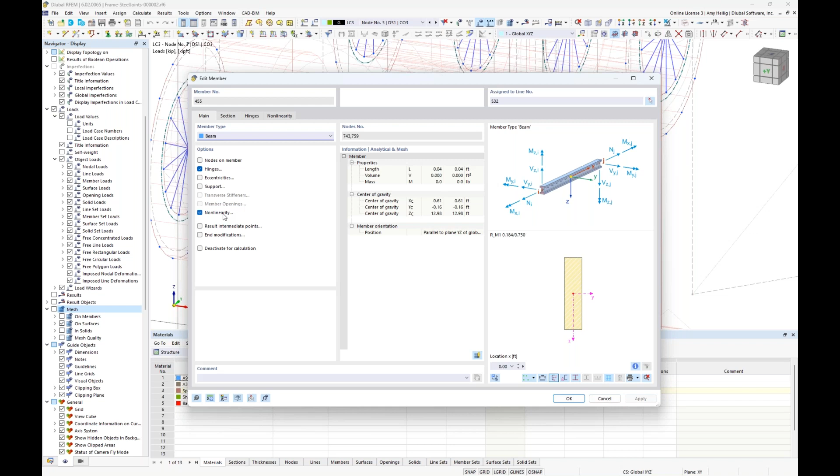We also have a nonlinearity applied here for this beam spoke member that it will fail in tension. So we really want this bolt to bear on to the plate element when it's in compression. But if we have any tension between those two elements, that connection will fully fail.

So that's what's going on a little bit underneath the hood: it's really just putting together all of these different elements into this FEA model. And by all means, you have the ability to manually create this same exact connection. We're just taking it a step further with giving you the ability to automatically generate this pretty complex model underneath the hood. A couple more things to touch on if we take a look at the materials.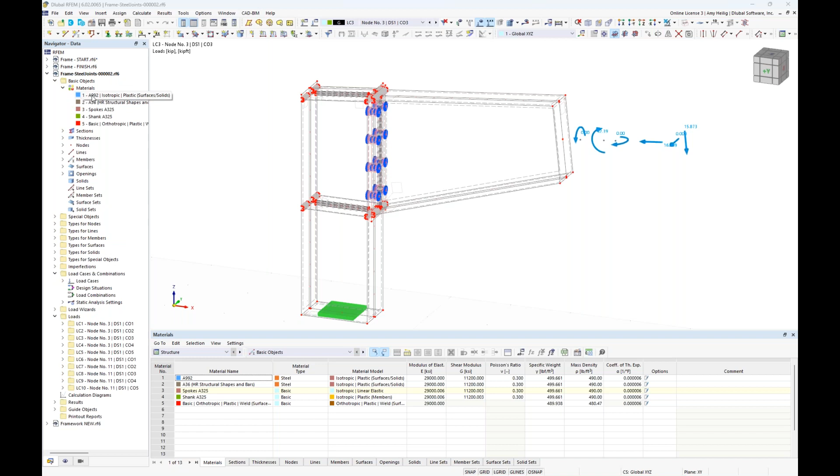So all of the materials are listed here for our beam elements, and I'll turn this into a rendered view, A992, A36, and even our bolt elements and our welds have the relevant material. But you will see that these are now converted to plastic material models rather than that linear elastic.

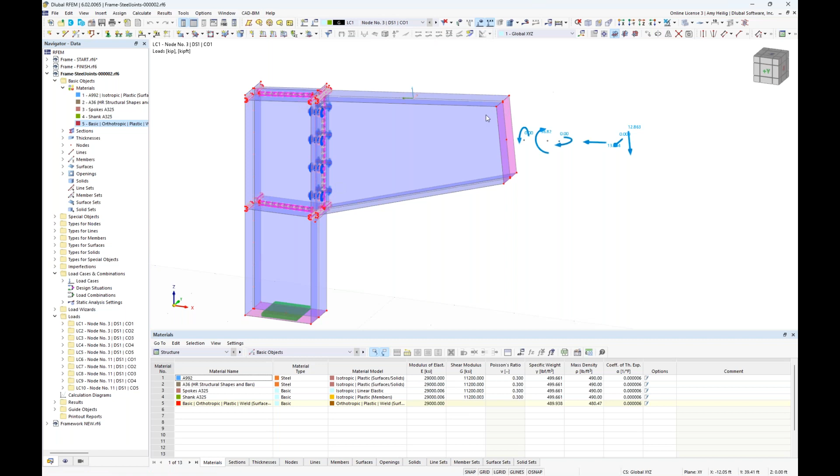And finally, if we take a look at our drop down about all the different loading scenarios here, these are our ASCE 7 factored load combinations that are being applied here to the member end. And as I scroll through these different load combinations, we should see these loads update automatically. They're applied here to a rigid plate. So this rigid plate allows the load distribution across the entire face here.

So we don't have to worry about topics like singularities because this load is distributed again to the entire face of these elements. And remember too, that we had to set at least one supported member. Well, we can see that support applied here at the bottom of the column. Okay, so that will cover here just the submodel.

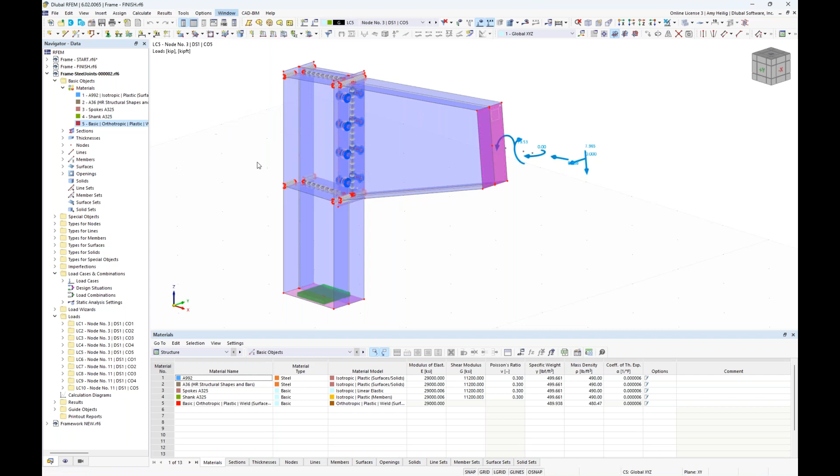So let us go back to our frame quickly to talk about the buckling behavior. So in addition to the design according to the AISC, if we go back to the steel joint design, we have an additional drop down here for the buckling analysis. And looking at the buckling analysis results in table format, we are calculating 4 eigenvalues here for each connection as well as each load combination.

So as we scroll through these, it should highlight exactly which connection we're looking at. And also you'll see here our critical load factor. And if you remember, under the configurations, we told the program to flag us if this critical load factor falls below 15.0. So what is a critical load factor?

Well, if we're currently looking at our connection here, and load combination number 2, the critical load factor is the value or the factor that you can multiply your loads in load combination 2 by before you're going to see some type of buckling behavior. So when we are getting down around to values such as 1.0, this is a very big problem. Anything less than 1.0, the connection cannot handle 100% of the loads before we're going to see buckling. So again, we can set that user-defined value of when to flag us for that critical load factor.

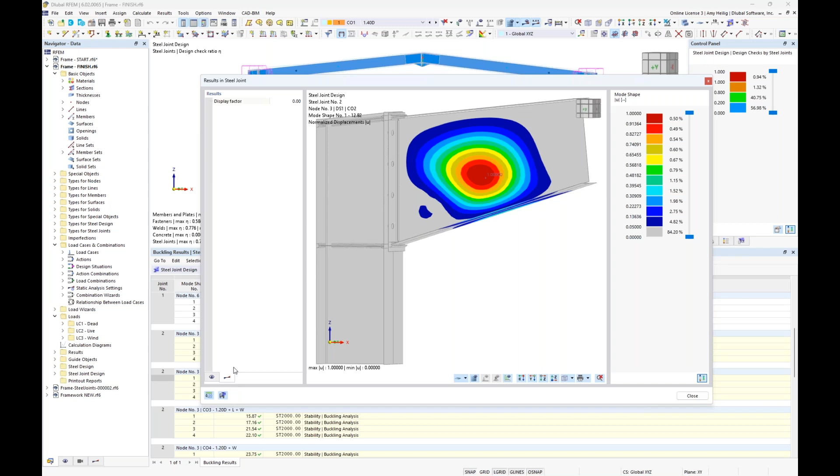What might be interesting too, in addition to the table format, is to yet again launch these results in the steel joint here, and it will look very similar to what we saw before, but there's a slight modification: now that we are viewing our buckling behavior, instead of viewing stresses and strains, we're viewing the eigenvalue, or the eigenmode. So we can see that under this particular load combination number 2 and our critical load factor of 12.82, we might be concerned with buckling within the web of our tapered member.

If we scroll back up here to maybe our center connection, and we'll go ahead and launch the display of the buckling behavior. Notice this critical load factor is much higher for load combination number 1 at 31.09. But in this case, we might be a little bit more concerned with the initial buckling of our flanges, with a secondary concern of these web elements here for that center connection.

So buckling is certainly something that is not easily accounted for with hand calculations, analytical calculations for connections. So we have the ability here to carry out this additional analysis and determine, if buckling is a concern, do we need to increase the thickness of these surfaces, such as the web members or flanges, or maybe we need to add additional stiffeners with those component input options.

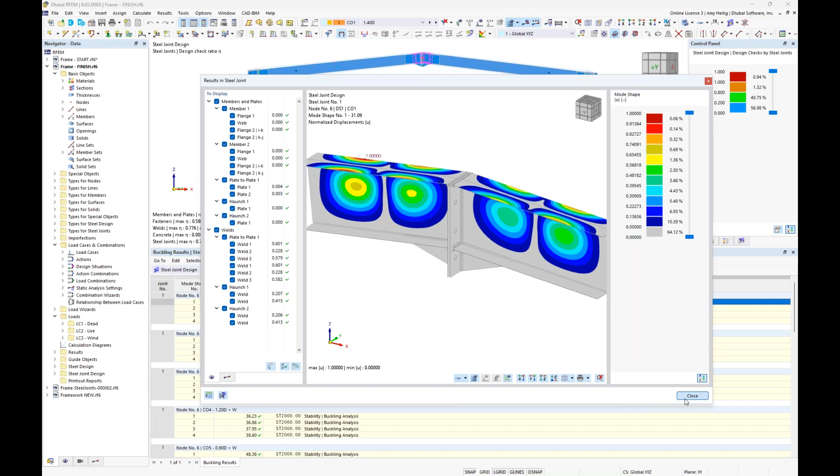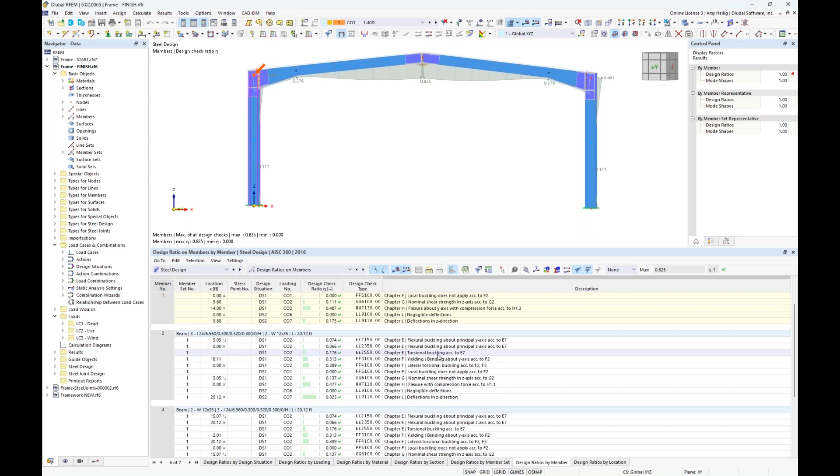So that will sum up the connection design, but keep in mind that we also did the steel member design. So we can view the results of the steel member design within our table format here and the design ratios by each member. And again, just as we would any other steel model, we can get full design according to the AISC. Notice that all of the calculations are carried out with each one of the relevant chapters within the AISC. So the ability to design the members and the connections is just quickly shown with this example model. So that will sum up this example.

Now, I know that this was a very simple application, and we might argue, well, I could easily do hand calculations or use my current software for connections such as this. But I did want to open up another RFEM model with maybe a little bit bigger of a structure. So you'll notice that we have multiple steel members shown in 3 dimensions. And I even have modeled a couple of concrete platforms within this particular structure. And if I go to the wireframe view, you'll also notice that I have defined these joint connections at all of the major intersections of our steel members.

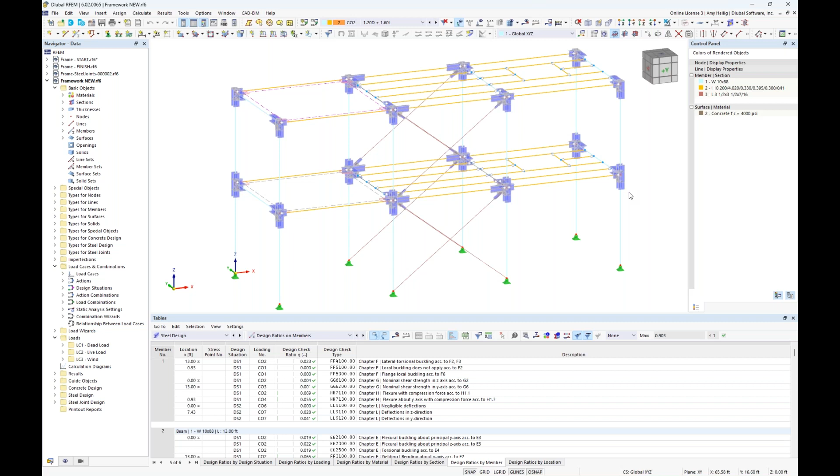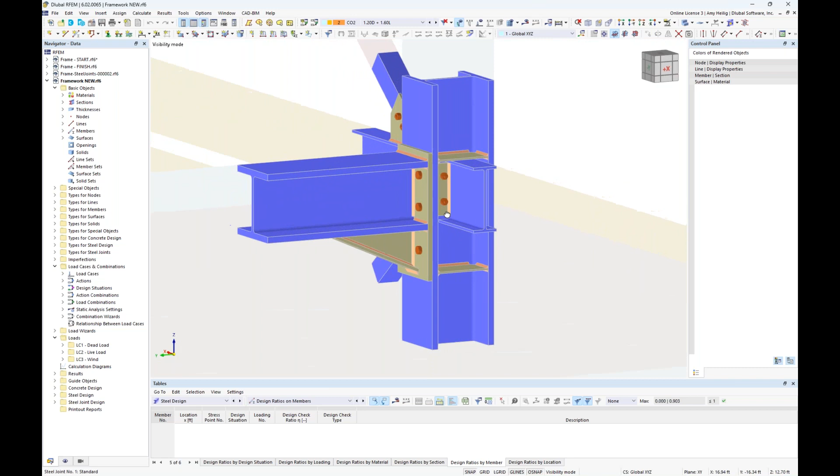So if we take a look at maybe one of these particular connections, I'll go ahead and create a visibility by this selected object, and let me turn this back into a solid rendered view. When we zoom in, we can see that this connection is certainly a little bit more complex than what we just saw with our 2D frame. We have beams framing into the column in the strong axis. We also have beams framing in the weak axis. I have added end plates, haunches. We have stiffeners shown here. So quite a bit more going on.

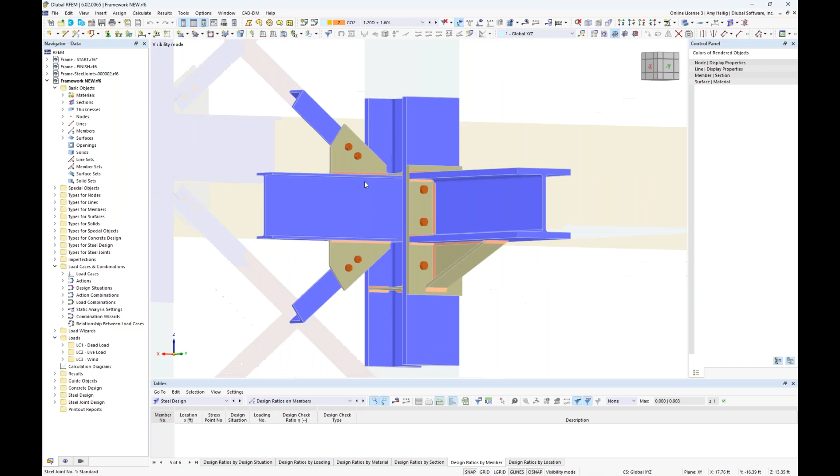If we rotate over here on the right-hand side, we also have these tension-only braces that are transitioning from these plate elements, and they are welded to the top and bottom flange of my beams. So we also can carry out, of course, the full connection design here. I'll go ahead and zoom out and rotate this back around. Under the steel joint design, you can see that the design ratios for each of these nodes are carried out. We have 3 design checks here for our plates, our bolts, our fillet welds, with an all-encompassing FEA submodel shown for each one of these connections.

And we also have carried out the steel design. Again, all of these steel members have been automatically designed according to the AISC, and I even took it one step further to design these concrete platforms. So I carried out the ACI design, considering the reinforcement applied. We see a couple high reinforcement design ratios shown here. That's no surprise, an issue of shear where these platforms are connecting back to the steel members. But all in all, an all-encompassing option within RFEM to do a multi-material design along with the AISC connection design as well.

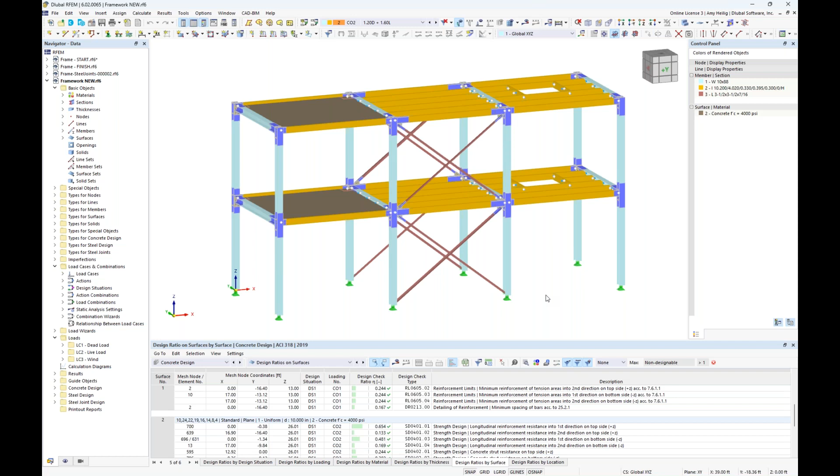The only exception to this is round HSS. Currently we support square and rectangular HSS; round HSS is in development and should be released soon. A preloaded bolt input is also not quite ready, but is currently in development for topics like slip critical connections, so that should be available soon.

We also recognize that AISC 360-2022 was released, so we'll add updates to the standards. You'll have the ability to design according to the 2016 or the 2022 version as soon as we implement that.

Additionally, we are planning to add the ability to export the true stiffness of this model back to the main structure. This joint stiffness is already calculated with the FEA submodel, so we know this about the connection. We can export that stiffness for member design rather than having fully fixed or fully released member end releases, allowing us to account for the true stiffness.